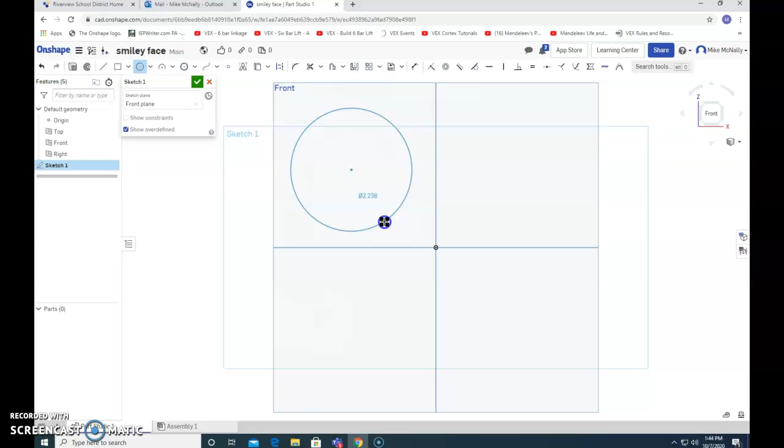Sketch on here, make a circle, and put it up here. Alright, there's our head. Don't forget, we got to give it thickness. Always got to say extrude, and we're not going to have it be 1 inch, we'll say 0.5.

So, okay, we've got our disc. That's our smiley face. Okay, let's give it eyes.

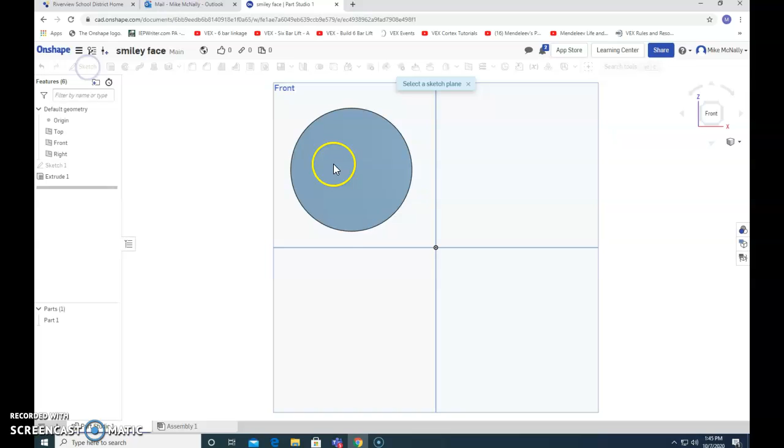Sketch on our disc, and let's make one of the eyes elliptical. Right click, I click again, and then I click again. The second click is telling it how up and down.

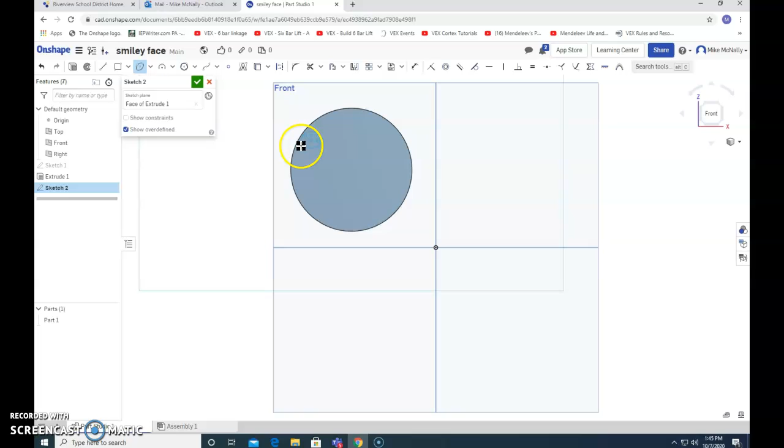Make it pretty close to the... make it sort of narrow. All right, and let's give that a little bit of depth, and we'll have it stick out. I don't think we want it to stick out 1 inch, but let's try 0.5.

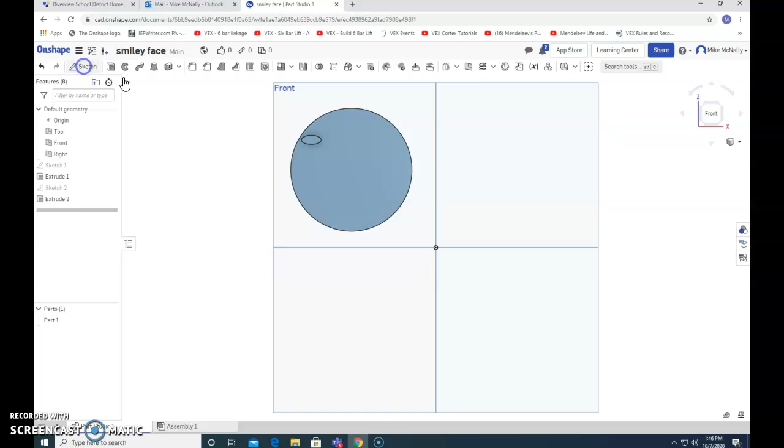Enter, and let's make another eye on the other side. It's a center point circle. We're not going for pure beauty here.

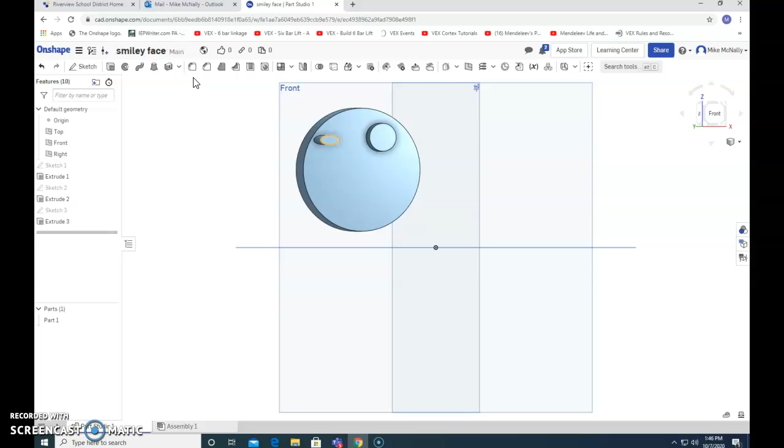Let's make that 0.25. And we've got 2 eyes. Alright, maybe the one is kind of winking or something.

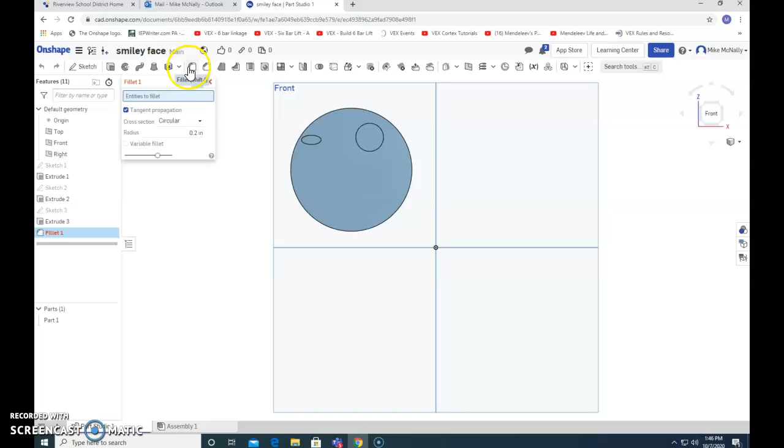Just for fun, the one thing I don't know how to do on ellipses, but let's make a fillet of the circle. If I click on fillet, it's asking me what entity to fillet. I think I can click on this and look at what it looks like now. It kind of made it like R2D2.

Let's change the radius to 0.1, and it makes it a little more like that. Yeah, alright, anyway, good.

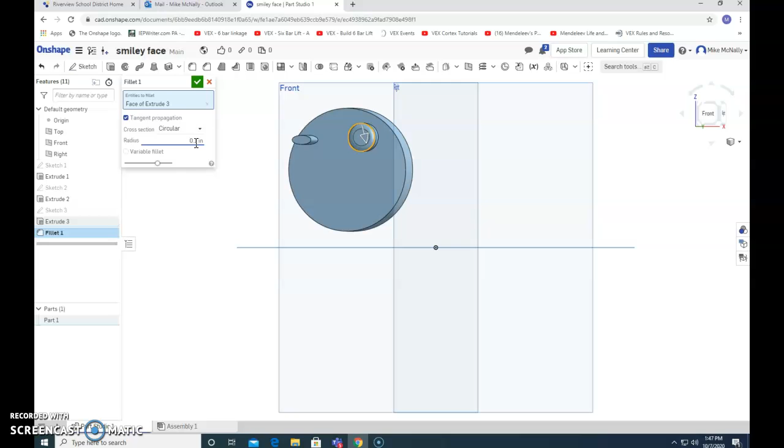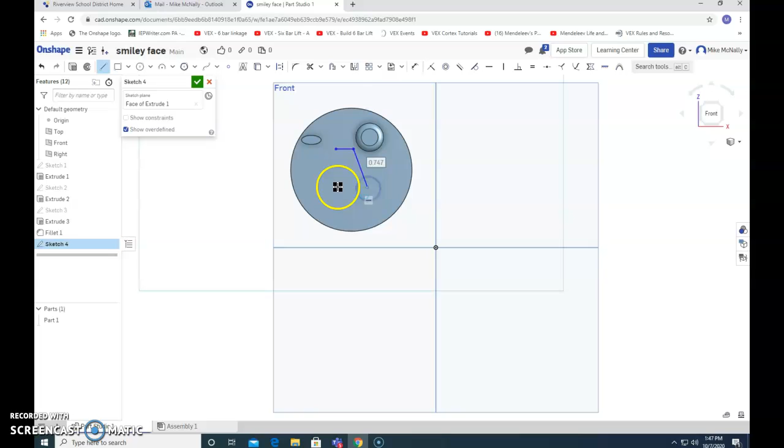Okay, let's try sketching on the face, and let's make a nose, and we'll just make a nose like that. And let's give that some depth.

I don't think we want a 1 inch nose. That'd be really big. 0.5. And let's just look at how that looks. Okay.

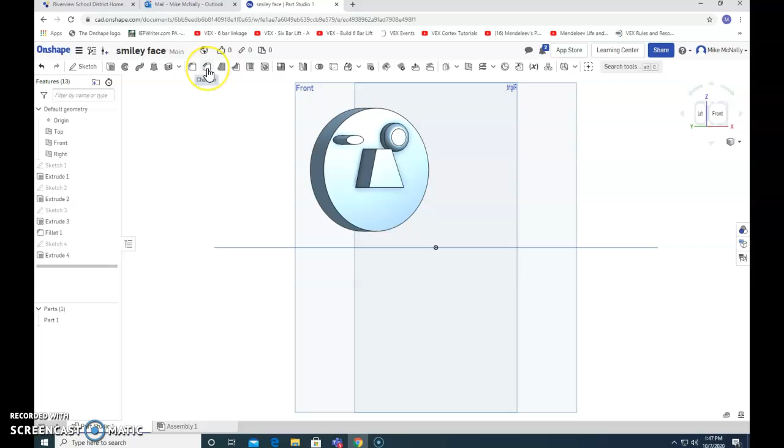Instead of fillet, giving it a fillet, let's do the chamfer. And it's asking what entities to chamfer. Let's see if I chamfer that line right there.

We could chamfer the front, chamfer the line. Let's try the front first. Okay, that's interesting. All right.

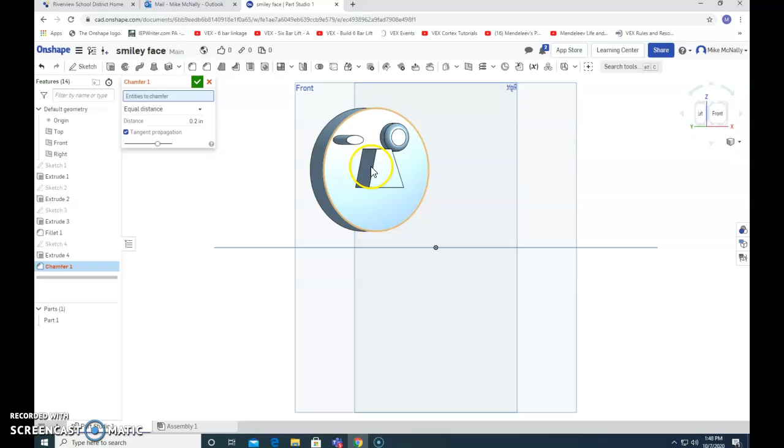Let's get rid of that. What if we just chamfered this line? And we'll just do the one side. If I can do, let's see if it'll let us do this bottom line too. Yeah, what about the top? Why not? Okay. There's our nose.

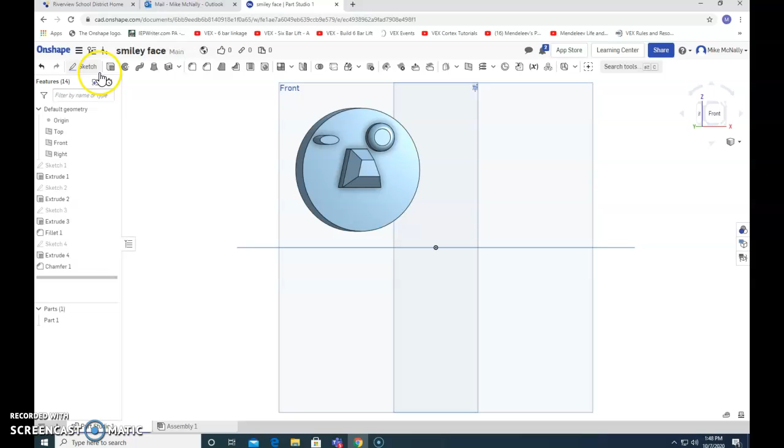And let's give it a mouth. Sketch on here. I'm going to use the spline tool. Pick this one. No particular reason. I'm not very artistic.

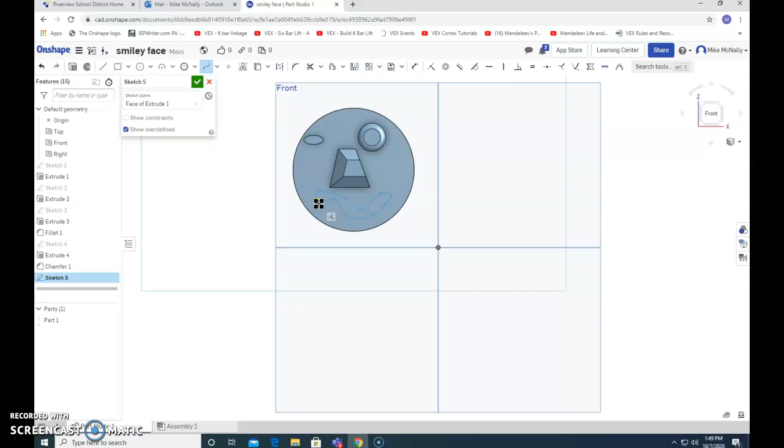And there's our mouth. And let's extrude. And this time let's remove it. 0.5. Let's see what that looks like.

Went all the way through. That's fine. Yeah, fine. So you can play around with more of that and then just making a funny smiley face. But I thought that that would be fun for you to make some kind of shape and use the tools at the same time.